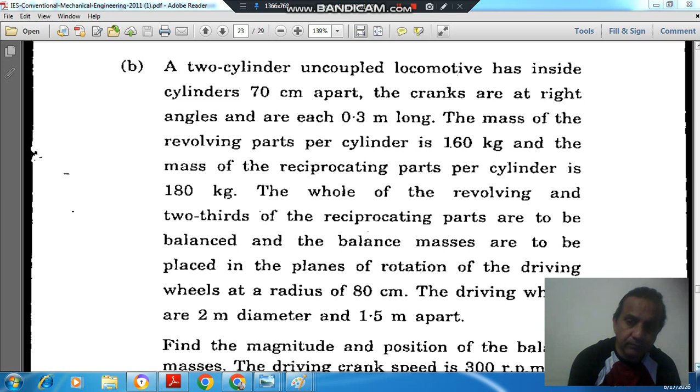Now we'll solve one question based on balancing of uncoupled locomotive asked in IES mains 2011. The question is: a two-cylinder uncoupled locomotive has inside cylinders 70 centimeters apart. The cranks are at right angle and are each 0.3 meter long. The mass of revolving parts per cylinder is 160 kg and the mass of reciprocating parts per cylinder is 180 kg. The whole of the revolving and two-thirds of the reciprocating parts are to be balanced, and the balancing masses are to be placed in the planes of rotation of the driving wheel at radius 80 centimeters. The driving wheels are 2 meter diameter and 1.5 meter apart. Find the magnitude and position of the balancing masses. The driving crank speed is 300 rpm.

So here we have first of all this diagram. This is the plane of cylinder 1 and this is the plane of cylinder 2. 1 and 2 are planes of cylinders, and 3 and 4 are planes of the driving wheel. The cylinders are 0.7 meter apart and the wheels are 1.5 meter apart. Suppose one cylinder is horizontal, the crank of the first cylinder is horizontal, and the crank of the second cylinder is vertical, shown by 1 here and 2 here. Suppose the balancing masses are to be placed at angle theta 3 in plane 3 and at angle theta 4 in plane 4. These are the planes of the driving wheel where we will place the balancing masses.

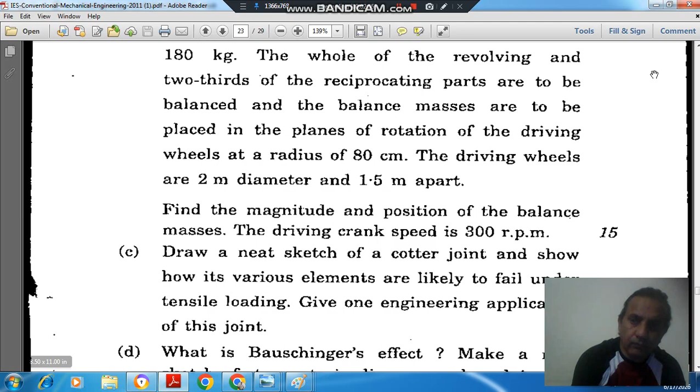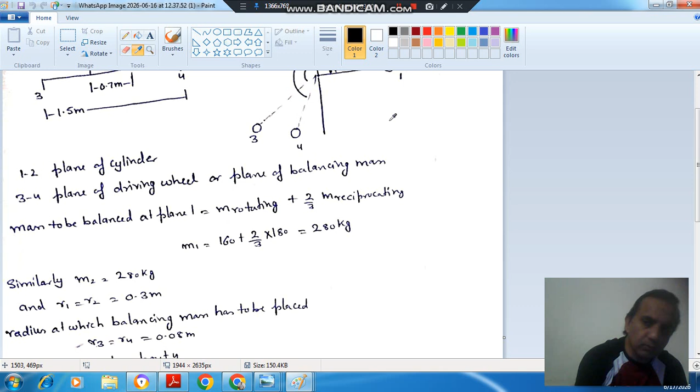First we find the mass to be balanced on plane 1. It consists of rotating parts plus reciprocating parts. As two-thirds of the reciprocating masses has to be balanced, we take 2/3 into 180. That is the mass of the system, and the rotating part has mass 160 kg, as given. The reciprocating parts per cylinder is 180 and the revolving part is 160. So this is the mass to be balanced on plane 1, which comes out as 280 kg. The same mass is also on plane 2 because the same cylinder configuration is there, so M2 will also be 280 kg, and these masses will be assumed at the crank radius since they are related to the cylinder.

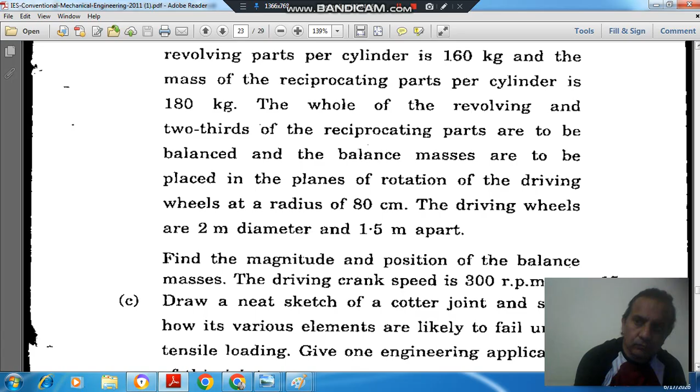So this is the method: we take this plane and assume this mass at the crank radius for cylinder 1 as well as cylinder 2. So M1 and M2 are 280 kg, and R1 and R2 are the crank radius, that is 0.3 meter. The radius at which the balancing mass has to be placed is 0.08 meter, as given: placed in the plane of rotation of the driving wheel at radius 80 centimeters, or 0.08 meter.

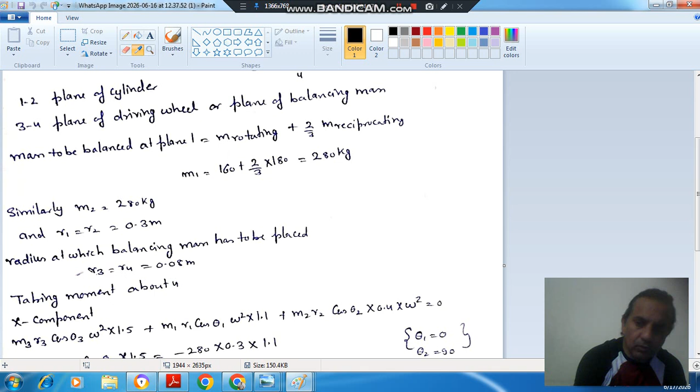Now we'll balance this by the analytical method first. For balancing, we take the couple first, and take the x component of the couple, taking plane 4 as the reference plane. We take moments about plane 4 for all the forces, that is at 3, 1 and 2. So the centrifugal force at 3 is m3 r3 omega square, its cos component is cos theta 3, and its distance from plane 4 is 1.5. The centrifugal force at plane 1 is m1 r1 cos theta 1 omega square, and its distance from plane 4 is 0.7 plus 0.4... actually it works out to 1.1.

And m2 r2 omega square is the centrifugal force of mass at plane 2, and its cos component is cos theta 2, and its distance from this plane is 0.4, because 1.5 minus 0.7 is 0.8, half of that is 0.4. So this is the cos component of the couples.

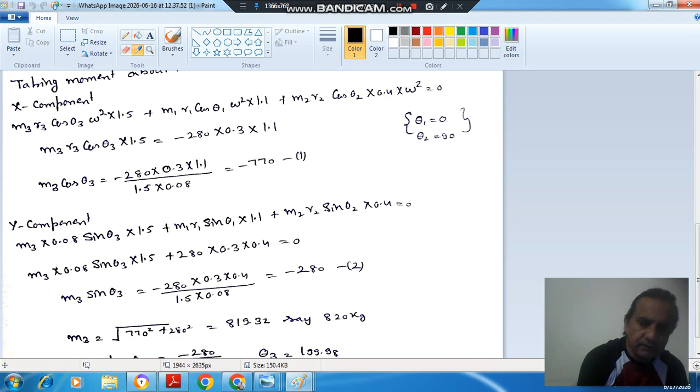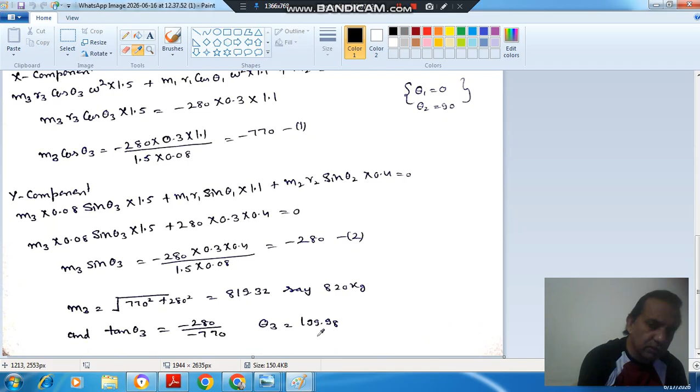From this we get m3 cos theta 3 equals minus 770. This is equation number 1, since theta 1 is 0 and theta 2 is 90. For the sine component, we take sine theta 3 and sine theta 2 instead, and solve for m3 sine theta 3, which comes out as minus 280. This is equation number 2. Squaring and adding these two gives m3 as 820 kg, and dividing equation 2 by equation 1 gives theta 3 as approximately 200 degrees, because both sine and cos are negative, placing it in the third quadrant, so theta 3 is 199.98 degrees.

This is about the couple. Now we will consider the forces. So we now have m3 and theta 3 determined.

Taking the x component of forces: m1 r1 omega square is in the x direction, so it is taken. The second mass is in the y direction, so we will not take it for the x direction. The third mass m3 creates m3 omega square r3 cos theta 3, and the fourth mass creates m4 r4 omega square cos theta 4. Putting in these values gives m4 cos theta 4 as minus 282.8175.

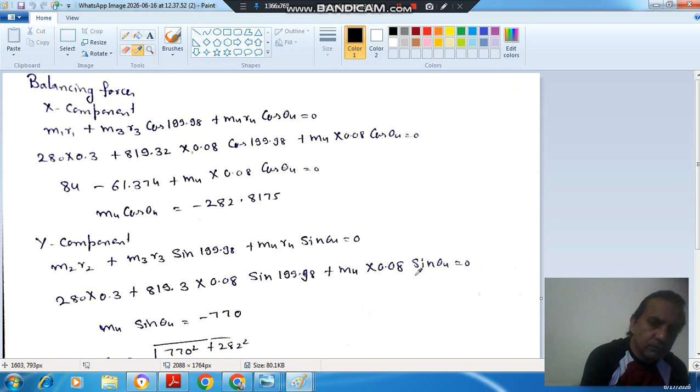Similarly, for the y component, we do not take m1 r1 since it is horizontal, but we take m2 r2 omega square, m3 r3 sine theta 3, and m4 r4 sine theta 4. From this we get m4 sine theta 4 as minus 770, and m4 comes out as 820 kg.

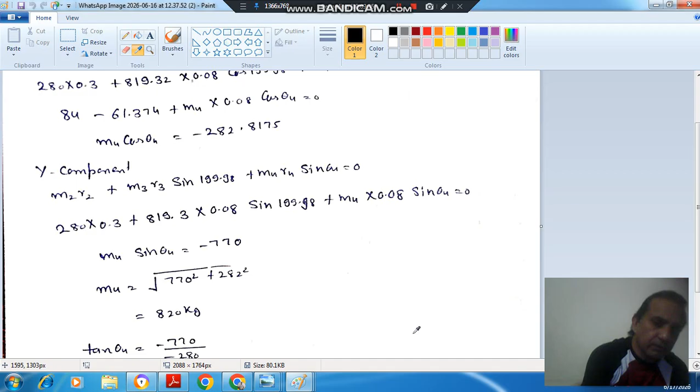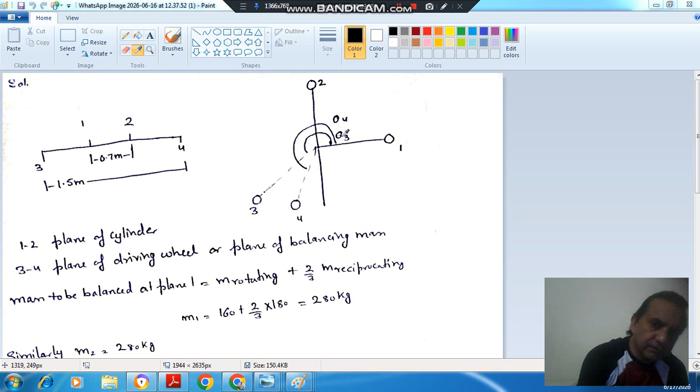And tan theta 4 comes out giving theta 4 as 250.016 degrees. So these are the angular locations of masses m3 and m4: theta 3 is 200 degrees and theta 4 is about 250 degrees.